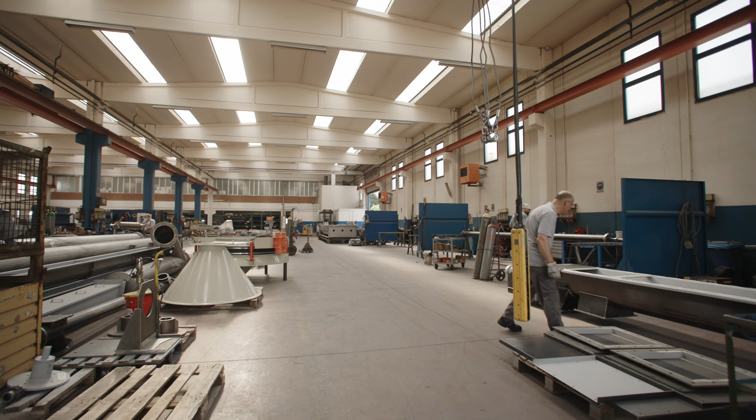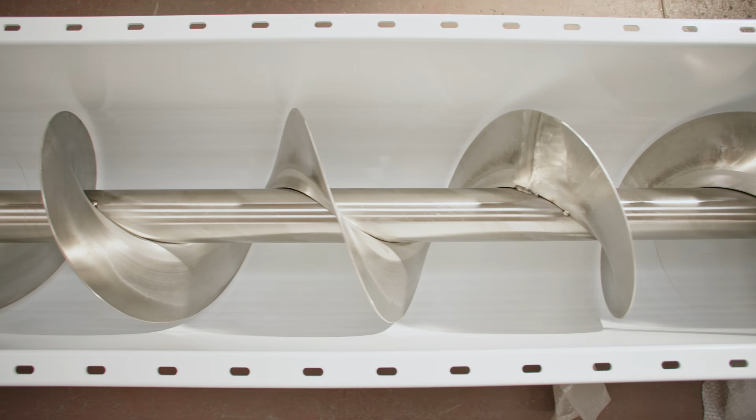Fansider SRL is a mechanical company with 40 years of experience in designing and manufacturing equipment for bulk solid handling and processing systems for the different needs of a variety of industries. Fansider's goal is to provide a tailored solution for customers looking for high-quality standards.

Our trip starts here, in the production department.

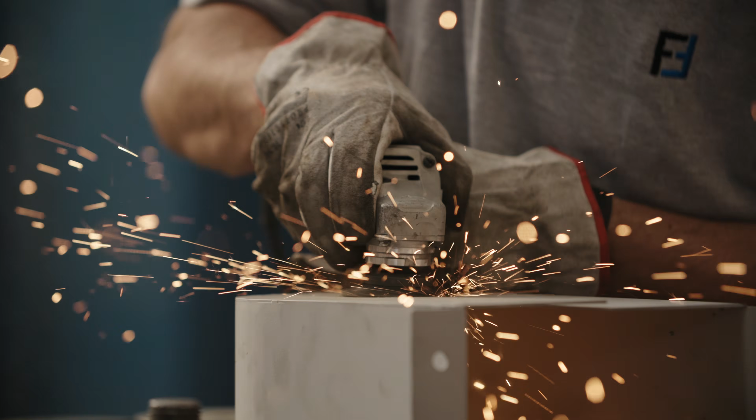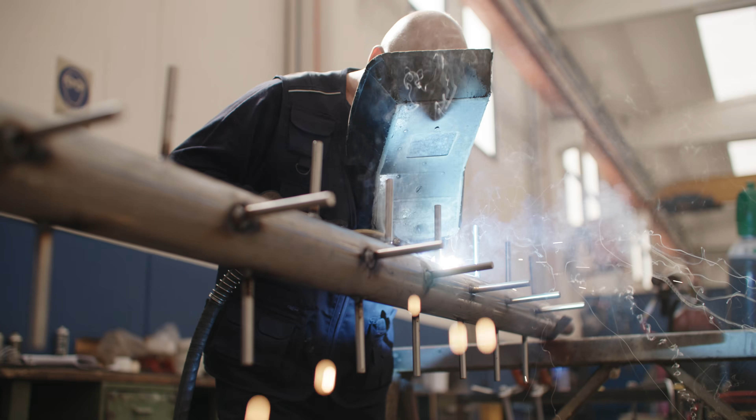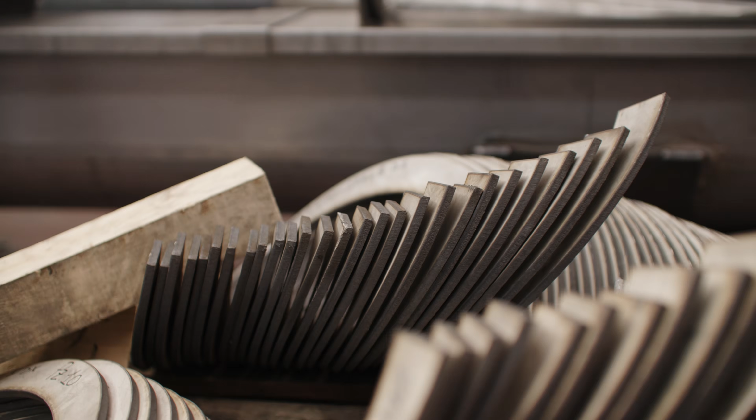The internal screw for conveying, dosing, or mixing is our core business. According to the product to handle and the application required in the process, we are able to design many different types of screws, starting from the shape, screw thickness and tubing deflection, up to surface and welding roughness, with the possibility of making specific linings.

Fansider provides a general arrangement drawing to our customer, and the customer is able to ask for any revision of the drawing before approval. But once the drawing is approved, raw materials and commercial components are purchased.

Ciao Mauri, buongiorno.

Maurizio, my colleague here, is checking the casing that has been developed according to the detailed drawings of that specific project. Maurizio will check all the internal and external dimensions, because this casing must fit with the approved drawing.

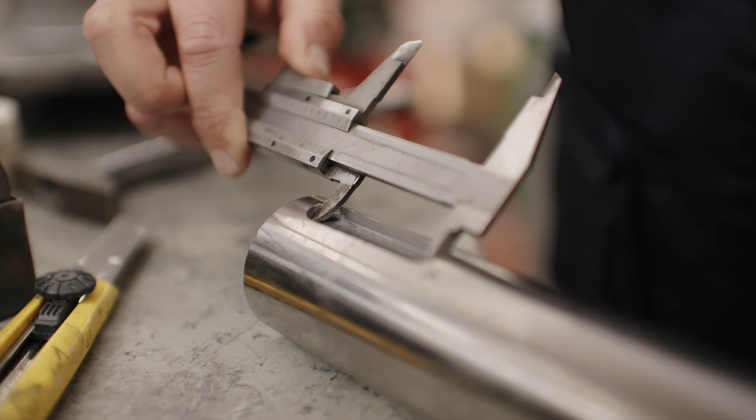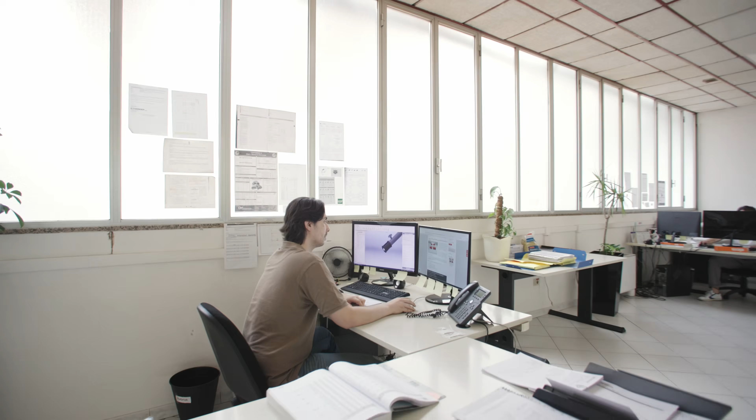What makes the difference between standard equipment and Fansider's equipment is the designing phase. In fact, Fansider's Technical Department designs every single machine according to your specification, and only after your official drawing approval does production start. In this way, during the designing phase, you are free to make all the modifications needed, revision after revision, avoiding mistakes or misunderstandings.

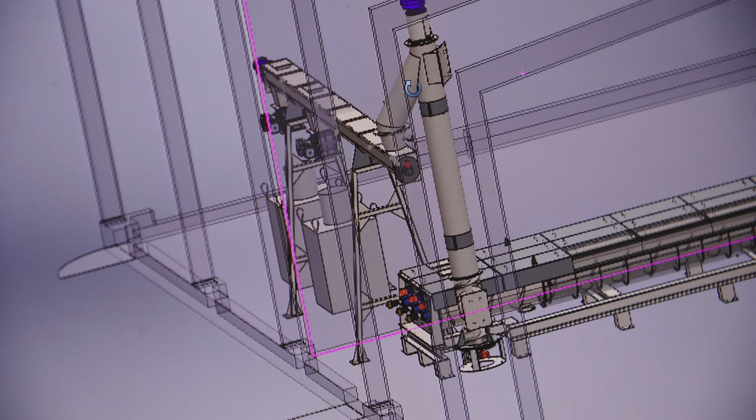While Maurizio is working and checking the casing, my friend here, Simone, is welding.

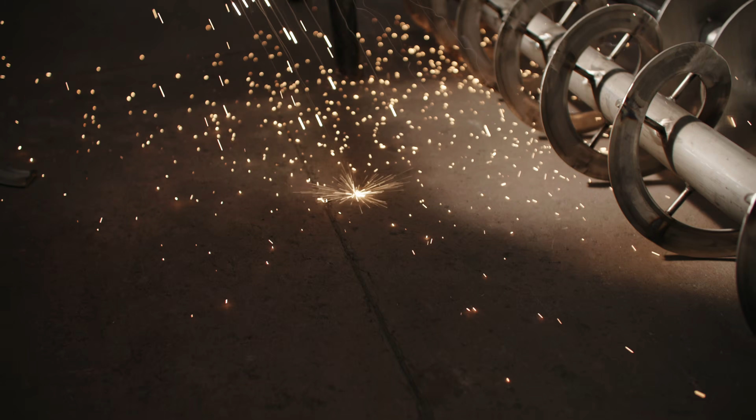Once the raw materials are checked and the internal screws are ready to be assembled, there you go, we are in the assembling phase. Before doing the assembling, we do a primer internally with our painting system.

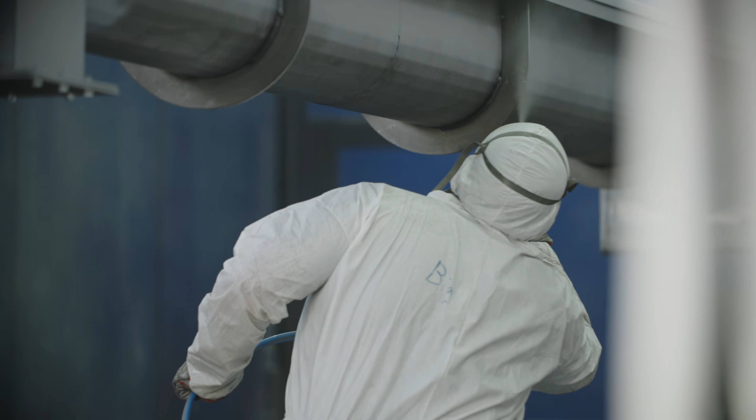A quick curiosity that I want to show you: when the screw conveyor is properly assembled, it should be moved easily by hand.

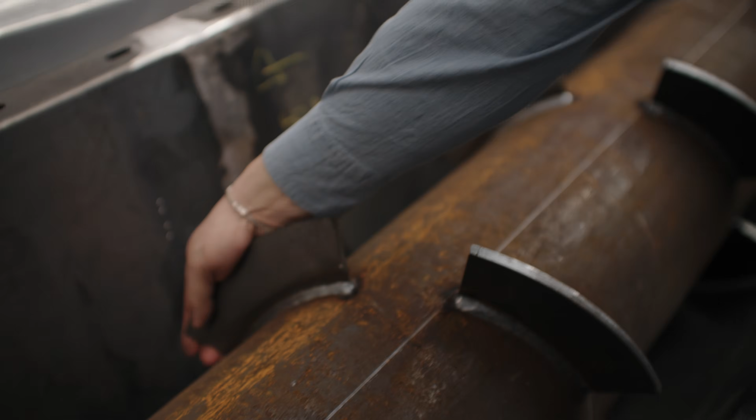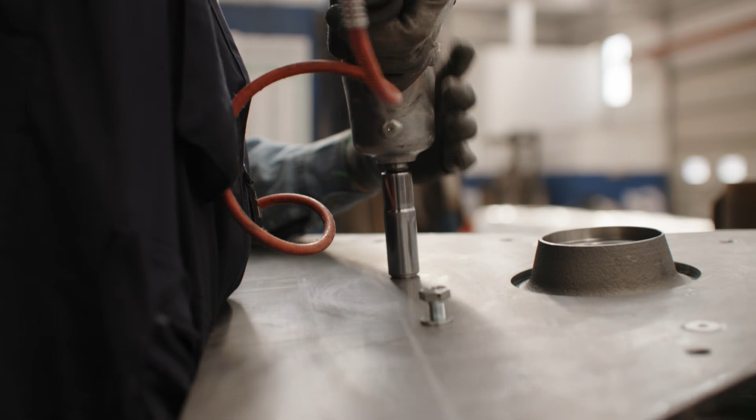When the assembling is complete and painting as well, we do the final check of the equipment before release. Maurizio over there does the following: first of all, we check the amperage of the motor. We let the screw run for 10-15 minutes. We check if there is any unusual or incorrect vibration, and this is the way we try to avoid 100% any possible claims from the customer.

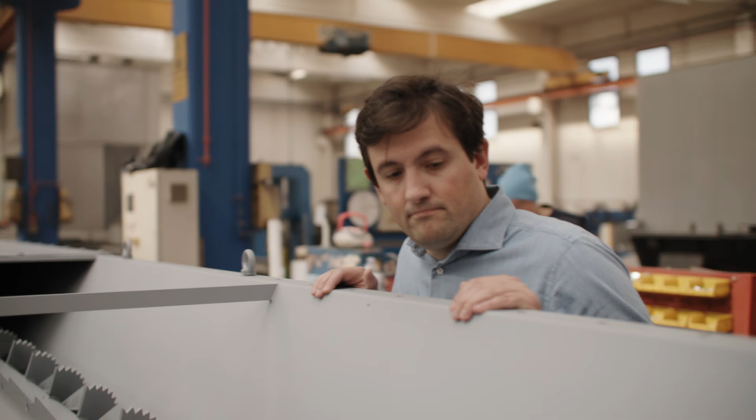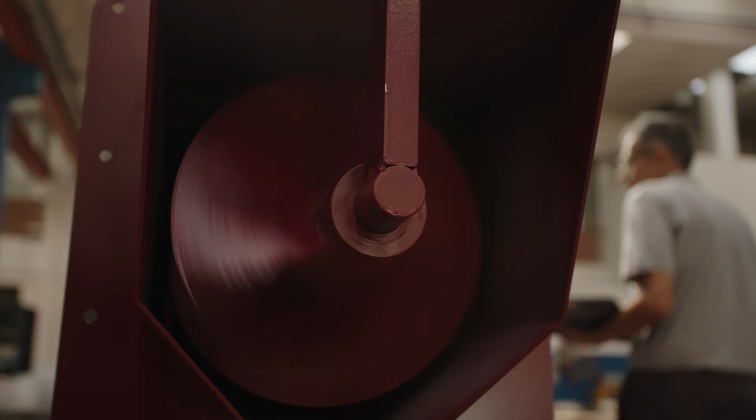As part of our ISO 9001 certification, each equipment is checked before dispatch through our inspection and test plan. Each machine comes with its own metal label with a specific reference code to help you request further spare parts or information.

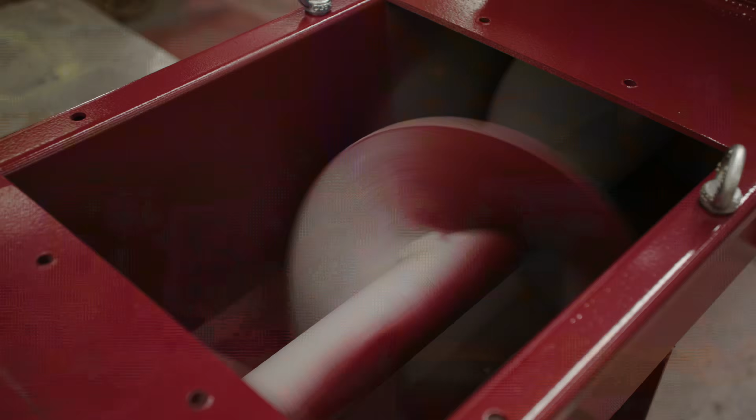Previously, we spoke about the importance of the designing phase, and here we are. This is the technical department, and this is my colleague Eddie.

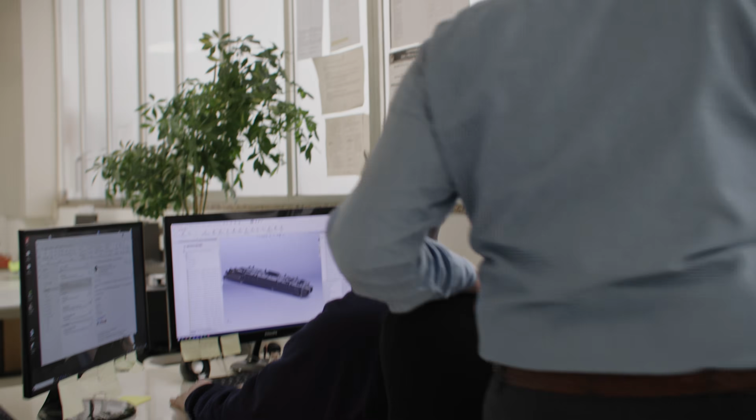Good morning. Eddie, could you please show us the screw we saw previously downstairs? Yes, of course. Very good.

I would like to see if we have already the weight and the general dimensions. Yes, 390 kilograms. Okay, let's say 400 to be on the safe side. I would say this is the length.

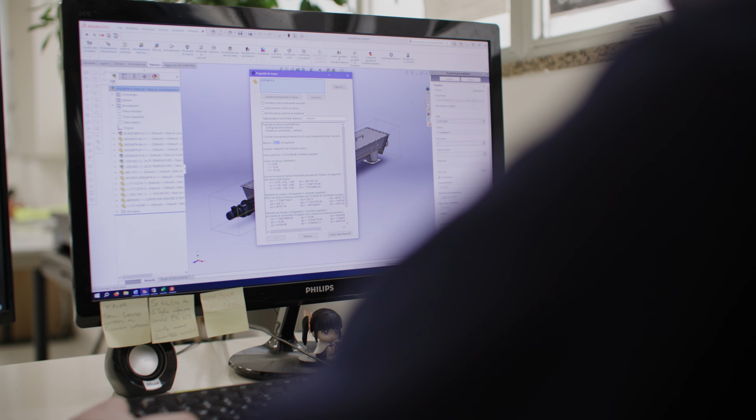Well, for the dimensions, I think you are going to complete the packing list, right? Yes. 5 meters enough? I would say 6 meters for the crate, and about 1 meter.

Okay, alright. This is mainly what we do when the screw conveyor is completed. We complete all the documentation, the declaration of incorporation, the assembly manual and so on, and then we just have to pack and dispatch.